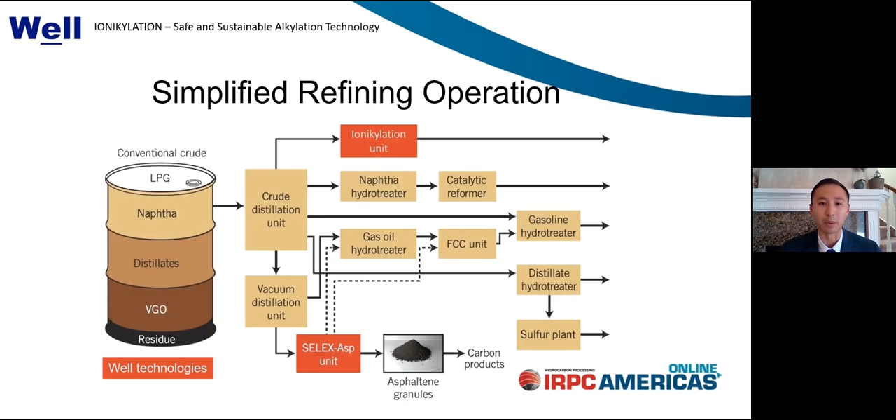Notwithstanding the short-term impact of COVID-19, there has been a growing demand for alkylate gasoline, underpinned by an increasing consumer base and a move towards higher performance engines, which require premium fuels. In North America, there have been historical environmental concerns over alternative gasoline blending stocks, such as tetraethyl lead and MTBE, which contributed to air, soil, and water contamination. Stemming from this are changes from a regulatory standpoint relating to increasing fuel standards with the aim of getting better fuel economy and cutting harmful emissions.

Alkylate is becoming increasingly sought after as a gasoline blending stock due to its inherently high octane number, typically in the range of 92 to 96 and as high as 98. Alkylate is clean burning, being free from olefins and aromatics, has low sulfur content, and is suitable for engines with high compression ratios, meaning more efficiency, more power for less fuel consumed.

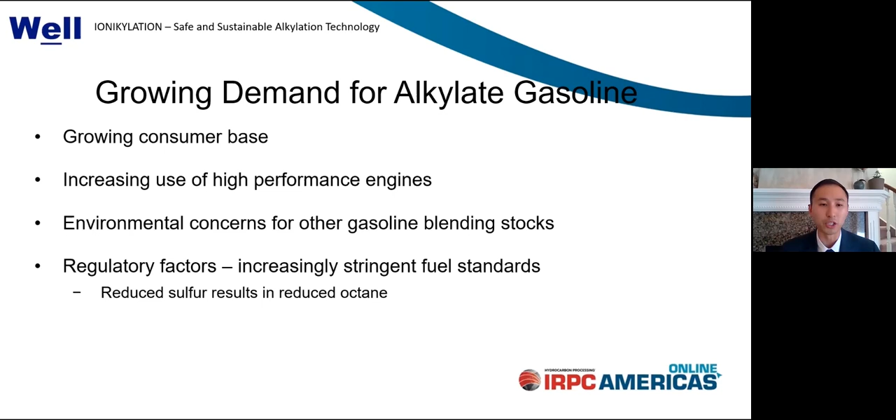Here's a listing of the various options available for producing alkylate. The first group are what I would call the legacy alkylation technologies, which either use HF or concentrated sulfuric acid as catalysts. While both of these processes are well defined and widely implemented, refiners using acid-based alkylation technologies require exotic metallurgies for process equipment and costly safety systems to protect refinery personnel and the public. The disposal and regeneration of spent catalysts are also problematic. For example, regenerating large quantities of sulfuric acid is carbon and sulfur emissions intensive and bad for the environment.

The second group encompasses what I call the newer alkylation technologies, which include the use of solid acids and ionic liquids. A subset of the ionic liquid category is composite ionic liquid, or what I call CIL, and this is the basis for Well's technology. I specifically highlight the composite nature of our catalyst because it is key to allowing us to overcome the typical corrosion and product selectivity issues arising from non-composite formulations.

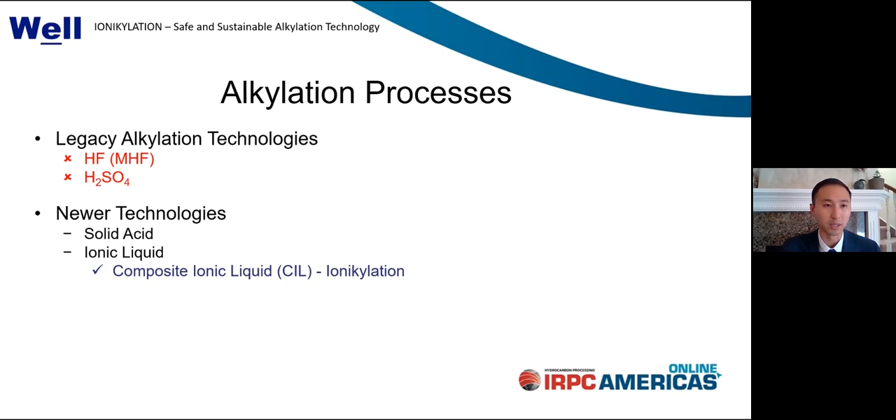Just to contextualize the risks associated with acid-based systems, there are about 50 refineries in the United States using HF, and on average, each facility stores about 212,000 pounds of this material. The EPA rates HF as highly toxic, and a large vulnerable zone must be established wherever this material is used. If released, HF tends to form a dense vapor cloud that can cause permanent injuries to the extremities and biological internals, and this has been widely explored already.

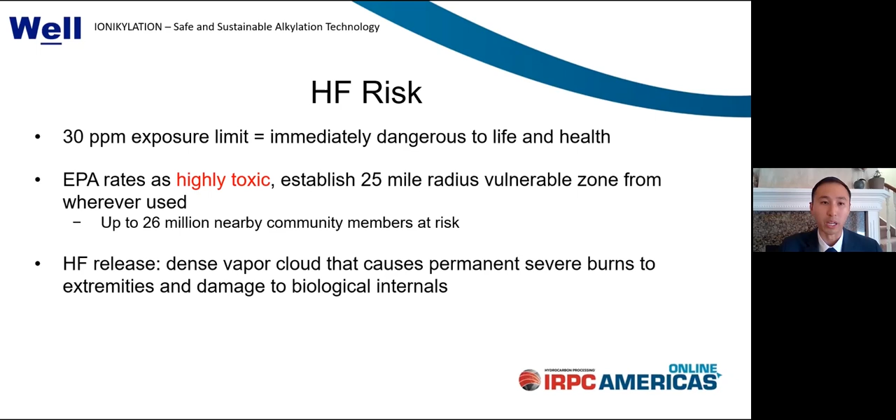When things go wrong in a refinery, it can be devastating, and here are just two examples. In 2015 and 2018, incidents in California and Wisconsin presented very real near-miss scenarios for HF release, when units adjacent to the refinery alkylation units exploded. In both instances, nearby community members were forced to evacuate for their own safety, and these incidents really highlighted the risk of industrial-scale HF use near populated areas.

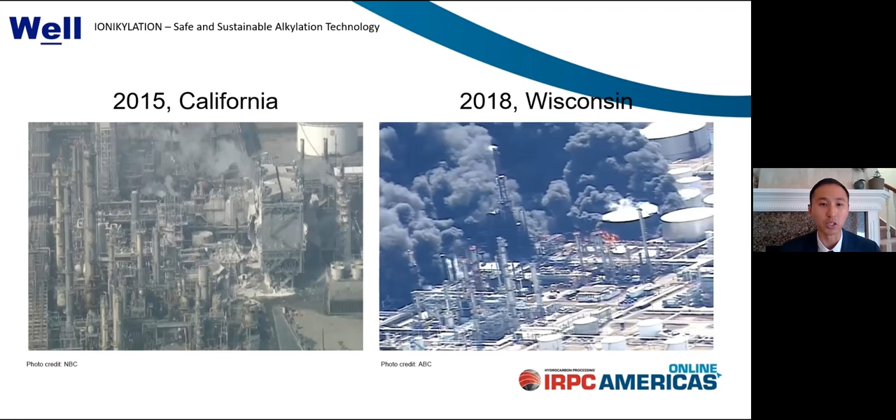Subsequently, local communities rallied to call for ending the use of this chemical in the operations and have even asked local regulators to step in.

Some of our viewers might remember this. In mid-2019, there was a refinery explosion in Pennsylvania where the HF alkylation unit suffered a catastrophic failure. The end result was that the refinery was rendered inoperable, and the operator subsequently filed for bankruptcy protection.

When we look at the bigger picture, over the years, there have been many instances of refinery personnel suffering injury as a result of accidental exposure to acid catalysts, irrespective of a catastrophic failure. Discussions on safety have largely been around preventative and secondary containment measures, largely due to the fact that there was no viable alternative, that is until now.

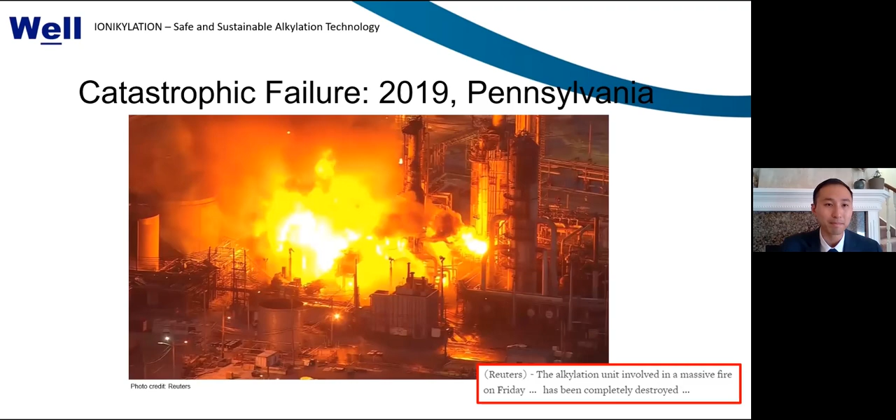But regardless of the safety measures put into place, there are real costs associated with the use of inherently unsafe processes in your operations, which can affect your bottom line. Here's just a sample from a Reuters article from January discussing the rising costs of insurance for refiners. In some cases, insurance rates have increased by 25 to 100%, and some refineries have subsequently pared back their coverage as a result.

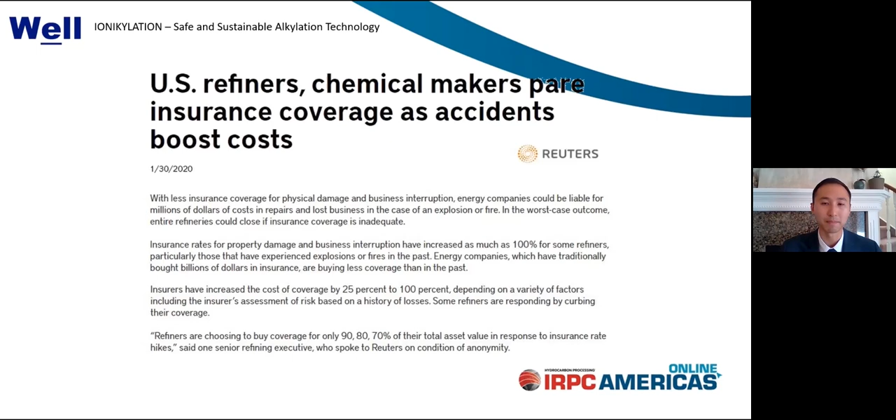So let's talk about Ionikylation. This technology derives its name from composite ionic liquid catalyzed alkylation. Ionikylation is characterized by five sub-processes. The first is feed pretreatment, followed by reaction, then product separation, product treatment, and catalyst regeneration.

Alkylate and light ends are subsequently subjected to fractionation, and unconverted reagents such as isobutane and N-butane are collected and recycled as needed. Depending on the user's required product specifications, alkylate may be subjected to a variety of post-treatment methods such as chloride removal, typically by adsorption.

At the bottom, extraction is used to remove a small quantity of spent catalyst from the process in the form of a benign solid, while the recovered catalyst is routed to the catalyst regeneration unit. At the catalyst regeneration unit, makeup catalyst active reagents are introduced. A regenerated catalyst is then routed back to the Ionikylation reactor, and an organic chloride compound is added to supplement the catalyst activity.

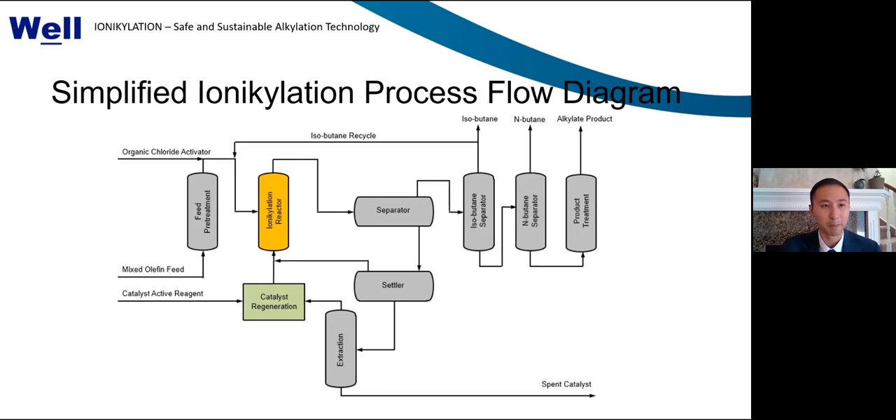So there are many advantages to the Ionikylation technology, and as I said previously, at WELL we're really looking to move the needle and provide a stepwise improvement to the current way of doing things. We understand that to do this, any compelling technology has to be competitive from a process performance standpoint, as well as from an economic standpoint.

By far, the greatest advantage of Ionikylation is its ability to eliminate a refiner's reliance on toxic and corrosive acid catalysts such as HF and sulfuric acid, which increases the safety for refinery personnel and the public. Because of the non-corrosive nature of our catalyst, all Ionikylation process equipment is manufactured using carbon steel, which significantly lowers the capital cost burden for greenfield and brownfield new builds, as well as revamp and replacement scenarios.

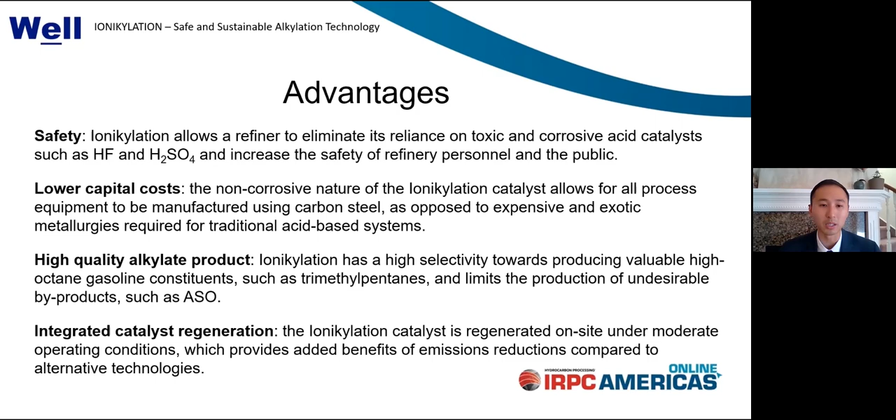Our catalyst is also formulated to have high selectivity towards producing the most valuable high-octane gasoline constituents, such as trimethylpentanes, while limiting the production of undesirable byproducts, such as acid-soluble oil or ASO. Our process also includes an on-site catalyst regeneration unit operating under moderate conditions, which significantly reduces emissions when compared to a scenario where you have to truck large volumes of spent acid catalyst to an off-site facility for treatment.

When we compare the legacy acid-based alkylation technologies to Ionikylation, a very clear picture forms. With HF, indeed, it is among the best in terms of producing high-quality alkylate due to its high activity and selectivity. However, it ranks quite low on safety measures, as it's both hazardous and extremely corrosive.

In comparison, while sulfuric acid is less hazardous, it still makes for a corrosive system, and catalyst activity and selectivity measures are greatly diminished. Hence why sulfuric acid-based alkylation systems require orders of magnitude more catalyst than the others. For our CIL-based process, it simply checks off all the boxes in terms of safety and performance, and I'll get into more of this as we progress through the presentation.

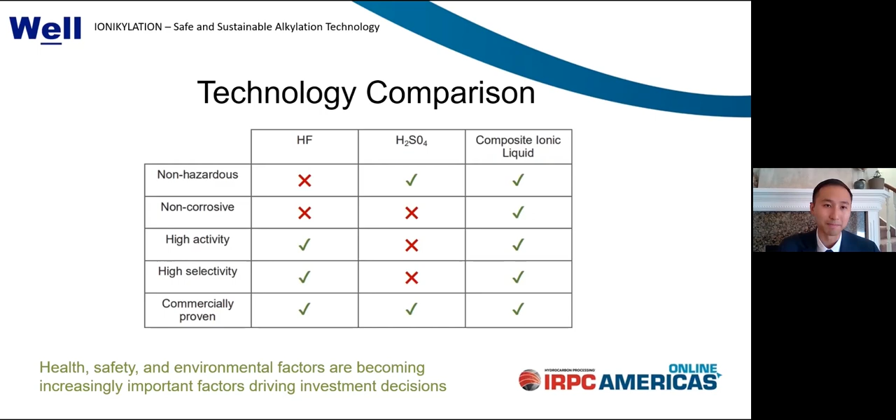Here we summarize the typical ranges of operating parameters for the key pieces of ionikylation equipment. As you can see, the conditions are quite moderate.

We normally recommend a feed isobutane to olefin ratio of 8 to 10 to 1, but it is not unheard of to have specifications outside of that range, which we can look at for you on a case-by-case basis if needed. When feed is injected to the ionikylation reactor, the reaction happens quite quickly, and in the presence of excess isobutane, we observe an isobutane to olefin ratio inside the reactor of greater than 100 to 1.

From a process performance standpoint, ionikylation produces superior quality alkylate with octane numbers ranging from 96 to 98, and this is dependent on the feed quality as well as how the user operates their unit. A very small amount of ASO is produced in the process, accounting for less than 0.1% of alkylate produced, and it is recovered and typically used as a diesel hydrotreater feed.

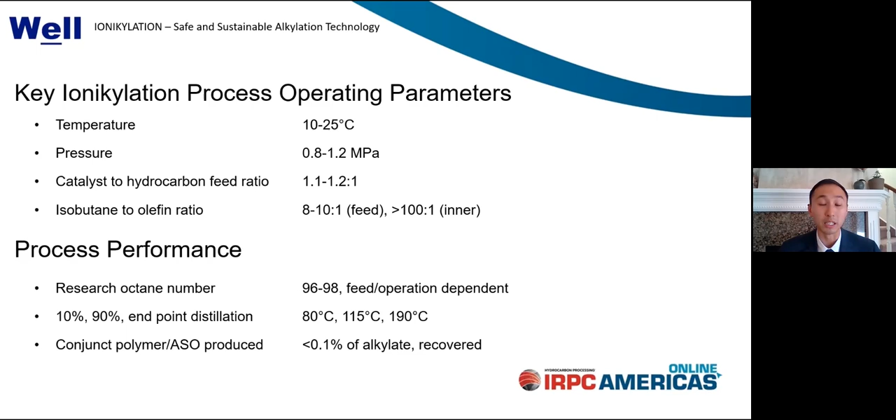Ionikylation is the culmination of over 20 years of research and development, and not only is it now market ready, it is already implemented in Asia with demonstrated through multiple commercial units. Catalyst and process development started in 1998, and it took a few years for us to formulate, synthesize, and fine-tune the details. In 2003, we successfully completed a 2-month, 20 tons per year, or 2 kilogram per hour continuous pilot test.

In 2005, we were given the opportunity to retrofit a commercial scale sulfuric acid alkylation unit owned by PetroChina, which yielded promising results. In 2013, the world's first greenfield ionikylation unit was commissioned in Shandong, China. This was built and operated by a private company as a standalone boutique unit supplying alkylate to the local market.

Commercial licensing ramped up in 2017 as Asian refiners began prioritizing health, safety, and environment in their operations, supplemented by that 2013 unit demonstrating commercial viability.

In 2018, 6 additional units were licensed, and PetroChina commissioned its first ionikylation unit at its Harbin refinery. In 2019, 2 additional units were commissioned, one by PetroChina and one by Sinopec. Sinopec also commissioned its second unit in the first quarter of this year at its Wuhan refinery, which was the world's first revamp from an existing HF unit.

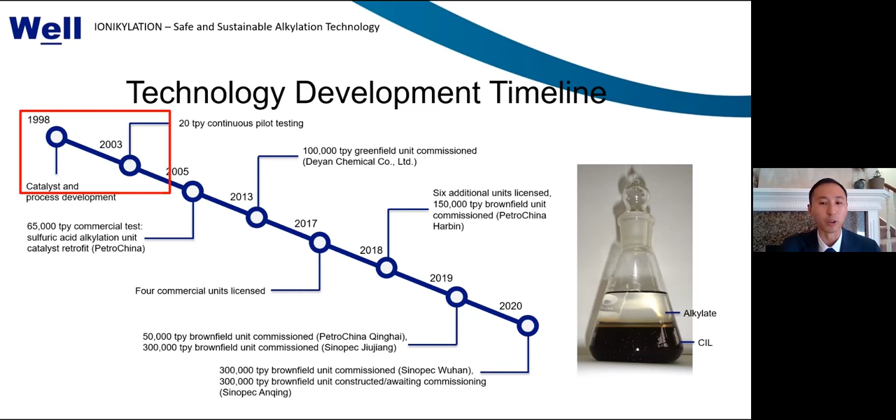Back in the late 1990s, we originally explored the use of ionic liquids as a quote-unquote super acid catalyst to crack petroleum residua at low temperatures. While we were largely unsuccessful in that endeavor, we did find that CIL was an excellent alkylation catalyst due to its high activity, reactivity, and selectivity towards producing high-quality alkylates.

But to get there, it was a bit of a journey, and there was a lot of trial and error in between. So here in the red, we show the iterations that represent our first trial stages, where we aimed to modify product yield and selectivity. We found that this could be achieved by modifying aluminum chloride mole fraction, as well as doping the ionic liquid with acids such as HCl.

Unfortunately, these systems we found were still corrosive, and our thinking at the time was that if corrosion still persists, that is not much of a stepwise change from the existing acid-based systems.

So next, in the yellow, are the second trial stages. Here we tinkered with different formulations to overcome the corrosion issue while maintaining activity. But what we found was that these mixtures tended to produce suspensions with the alkylate, which would make it difficult to separate in commercial settings and therefore non-viable.

Last, our team was finally able to develop an optimal CIL catalyst that could overcome all of the issues mentioned previously, in that it produced what we wanted, it was non-corrosive, and could be easily separated from the alkylate product.

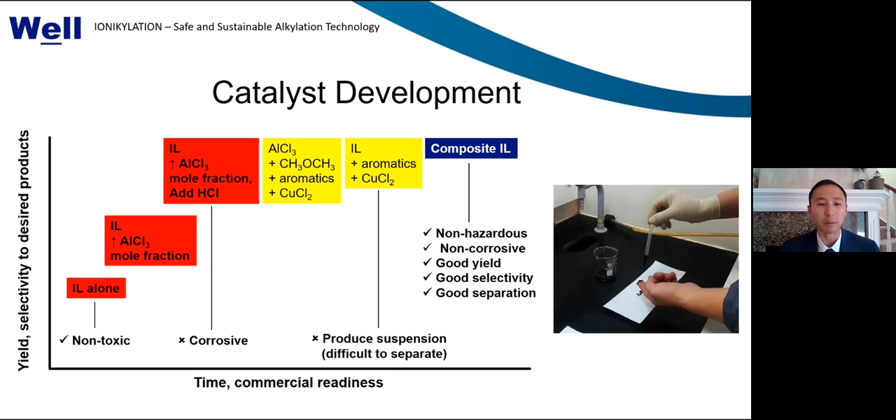This table summarizes the 6 commercial units constructed or already commissioned in Asia. 5 additional licensed units are either at the engineering stage or under construction, with the largest one currently slated with a 400,000 tons per year processing capacity, or roughly 10,000 barrels per day. So in total, worldwide, there are currently 11 commercial ionikylation licenses issued.

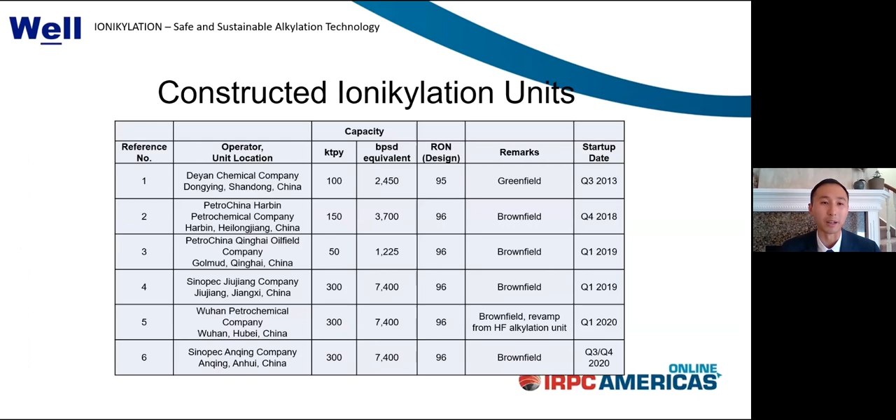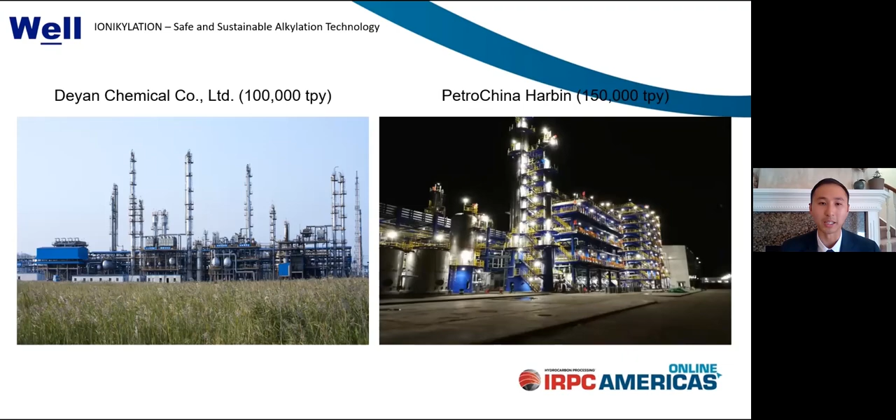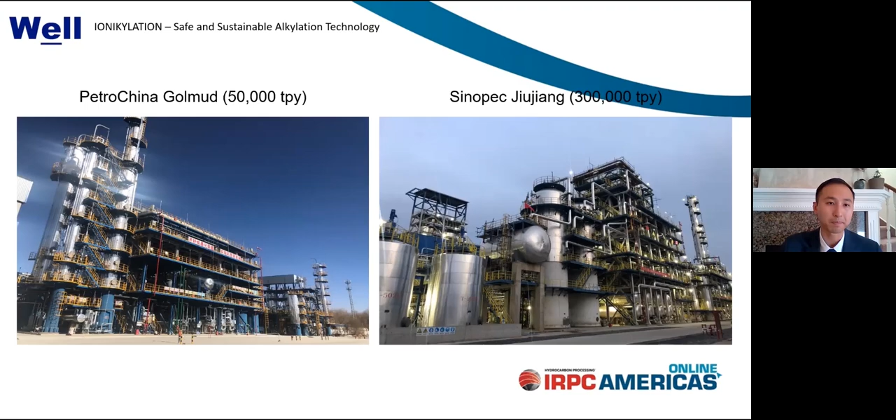Here are the images from the ionikylation units commissioned last year by PetroChina and Sinopec. And here are the Sinopec units with 2020 commissioning dates. The Sinopec Wuhan unit shown on the left, as previously mentioned, is the world's first commercial scale revamp from an HF alkylation process, and we're very excited about that.

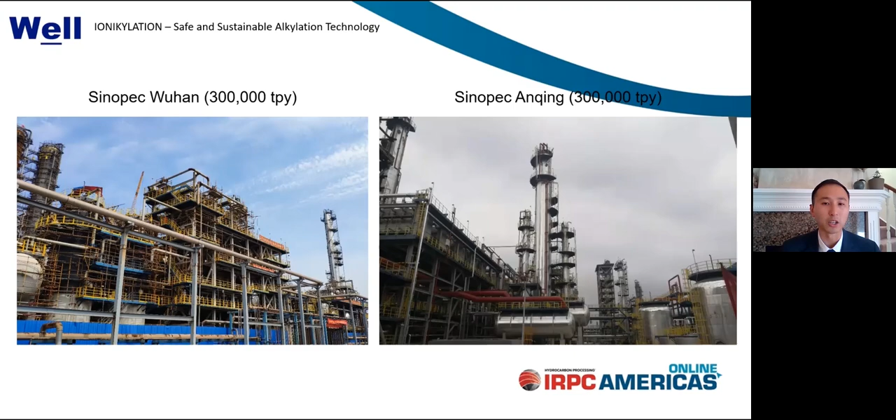This revamped unit was one of the last two remaining HF alkylation processes in operation in China. The Sinopec Anqing unit shown on the right was originally scheduled to be commissioned earlier this year, but due to complications from the COVID-19 pandemic, the scheduling has been pushed out to later this year.

So the next section is a case study of commercial ionikylation performance from one of the recently commissioned units in Asia.

Specifically, the data comes from the PetroChina Harbin unit that was commissioned in November 2018. At this point, I do want to thank PetroChina Harbin for allowing us to share this data in a public forum. After about half a year after commissioning, the operator conducted a calibration test to benchmark and compare commercial performance data against design specs to identify optimization opportunities.

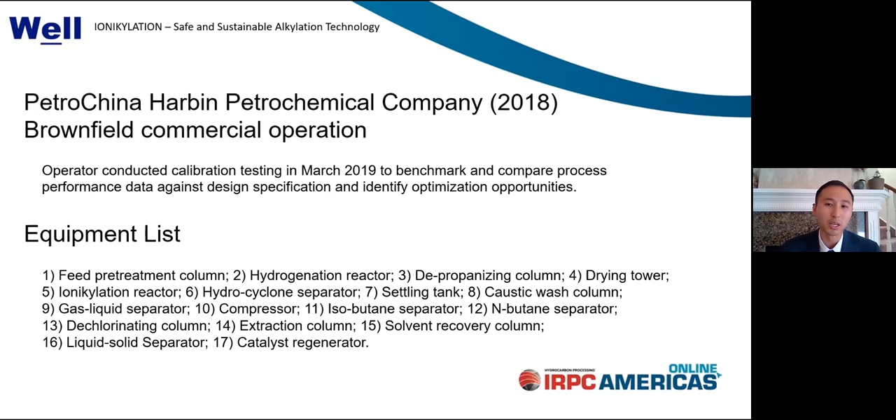To date, no safety-related incidents or concerns have been identified. And for anyone receiving a copy of this presentation afterwards, the equipment list provided on this slide coincides with the diagram on the next page.

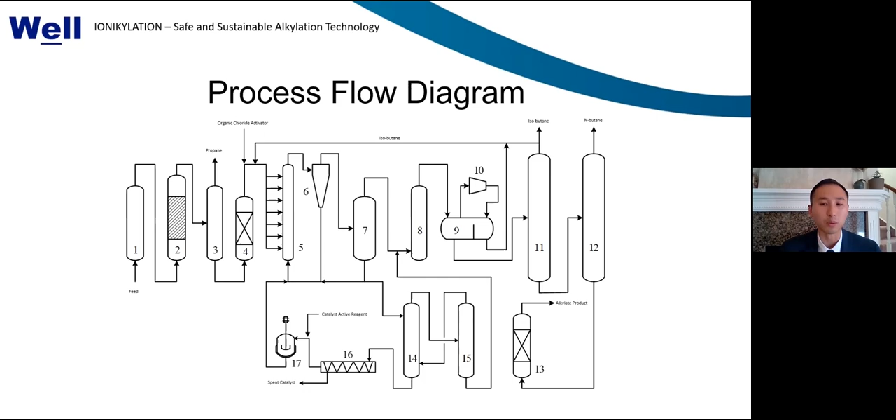The process operating flexibility for the Harbin unit was 60 to 110% of the designed processing capacity, and feedstock originated from an upstream MTBE unit. For this operation, a feed pretreatment hydrogenation unit was required for the hydrogenation of methyl ethyl ketone, and a dechlorinating adsorption agent was used for product treatment.

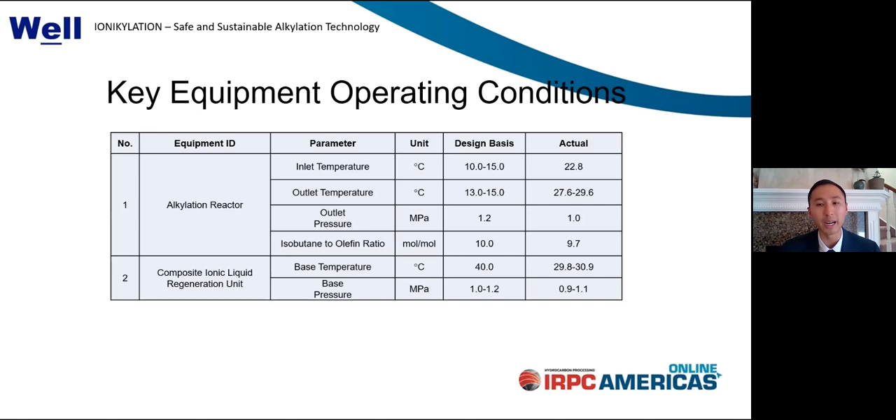Oftentimes, we'll be asked about the impact of operating the alkylation reactor at a higher or lower temperature. Based on our experience, for every about 10-degree increase in reaction temperature, this will decrease your alkylate octane number by about 1. Where this comes into play is during the design phase of a unit, where feed quality and an operator's product octane requirements will guide us in determining the degree of cooling that is needed in your system.

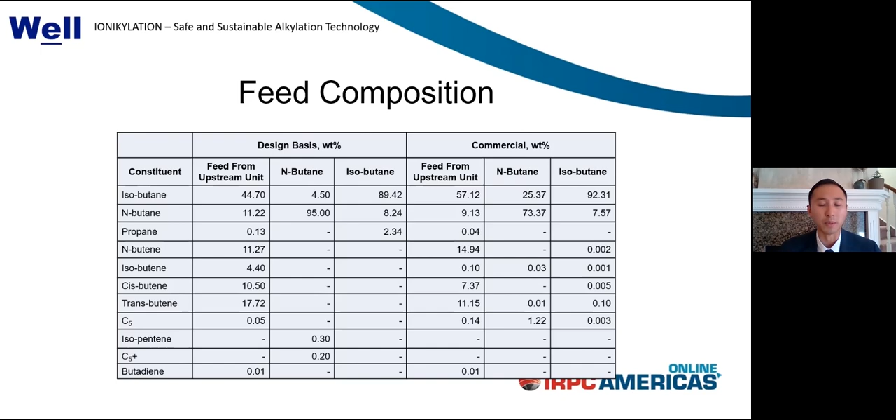One takeaway from this table is that regardless of what you design for, commercial operations are often difficult to predict and will always observe some degree of deviation. But despite the highlighted deviations in feedstock composition and reaction temperature, our process still rises to the occasion.

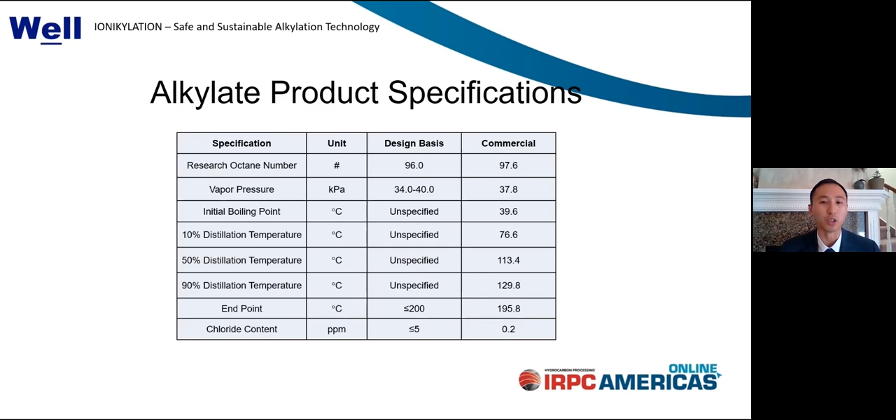Here's a more detailed breakdown of the alkylate composition. The process achieved 100% olefins conversion, and the vast majority of the product stream consisted of the sought-after isoalkanes. The C8 alkylate yield was about 77%, which is comparable to or exceeds the performance of traditional acid-based alkylation processes.

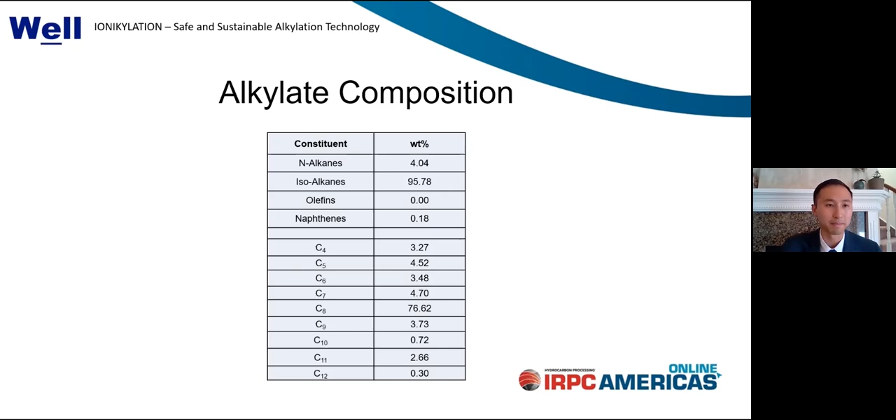Utilities consumption is also provided on a normalized basis in kilogram of oil equivalent standard. The takeaway here is that the commercial operation fell within 1.5% of the design specs. Note that the utilities consumption load for our process is quite similar to the traditional acid-based systems.

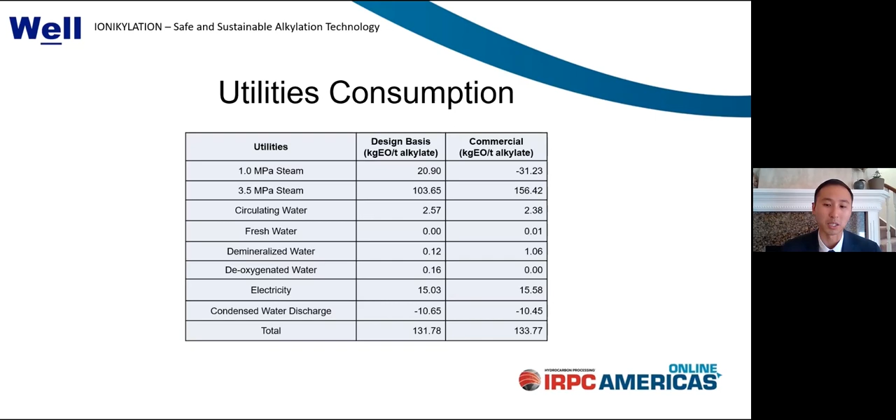Since ionikylation is a catalyst-based process, it's only fair to talk about catalyst consumption. For this operation, the design catalyst consumption was based on the performance of the previous commercial unit commissioned in 2013. However, due to recent process and catalyst manufacturing improvements, total catalyst consumables for this Harbin unit decreased by 46%, leading to significant, immediately realized and ongoing cost savings for the operator.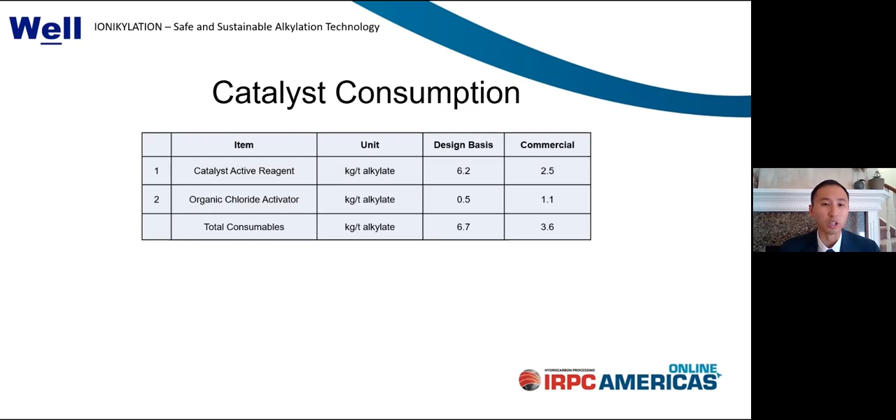One thing I also want to emphasize is that ionikylation is still a relatively new process, but this means there's a lot of opportunity for improvement as the process becomes more widely adopted into the future.

The spent catalyst byproduct from our process is chemically benign and can be safely handled and disposed. Here you can see the various stages of byproduct handling, moving from a benign paste discharged from the process all the way to a dry mineral-like solid.

A relatively small amount of this material is produced, and based on existing operations, it can be removed every few days up to two weeks, depending on the operator's needs or preference. Disposal options are also dependent on an operator's philosophy and local regulatory requirements, if applicable.

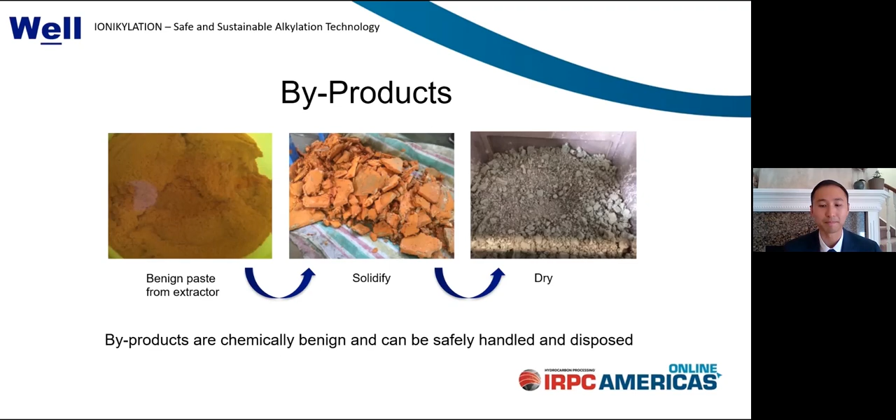This is just a brief reference to that 2013 greenfield unit constructed by Deyan Chemical Company. The crux of our process is the use of the non-corrosive CIL catalyst, which allows for all process equipment to be manufactured using low-cost carbon steel.

This Deyan unit operated for 3 years continuously before it was briefly shut down for a 2-week period for a rigorous government safety inspection. The inspection found no signs of corrosion within the process equipment whatsoever. There were no mechanical or maintenance issues, and the operator had no problem restarting the unit.

So in terms of ease of operability during a turnaround scenario, we don't see any issues. And with regard to the frequency of turnaround, all I can say is that the most likely scenario for taking this type of unit offline would be when performing a turnaround on units upstream of the process where you disrupt the feed.

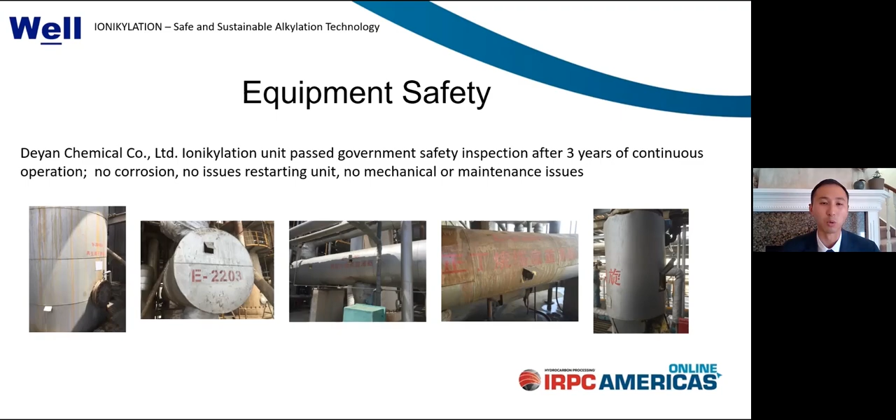Here is the recommended guidance for feed contaminant limitations. And the takeaway here is that there are various control measures available for achieving these specifications.

We do very tightly want to control water content in the feed because it will hydrolyze the CIL catalyst and break it down.

And as a feed pretreatment step, we also frequently recommend isomerization of 1-butene to 2-butene, as this will drastically improve the alkylate product octane number. Greater degrees of other contaminants typically serve to reduce the catalyst activity, which means you might need more catalyst if contaminants are not controlled.

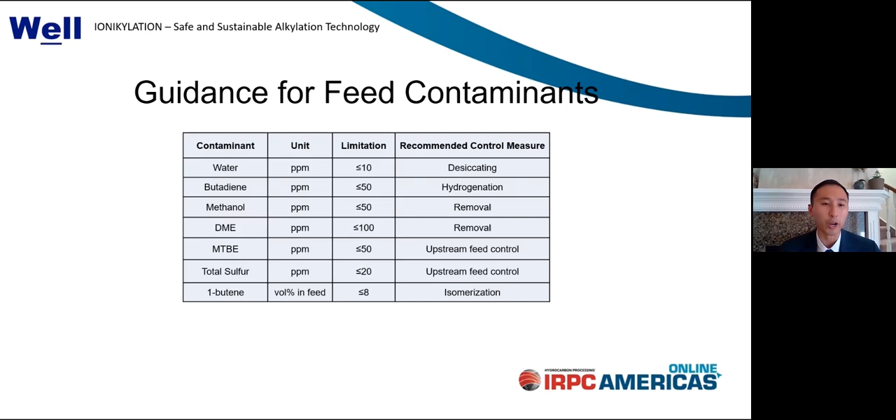Lastly, I want to quickly discuss scenarios for converting existing acid-based alkylation processes to ionikylation based on our previous experience. Regardless of which process you're converting from, the minimum equipment required will include the ionikylation reactor and the catalyst regeneration system, as they're unique to our process.

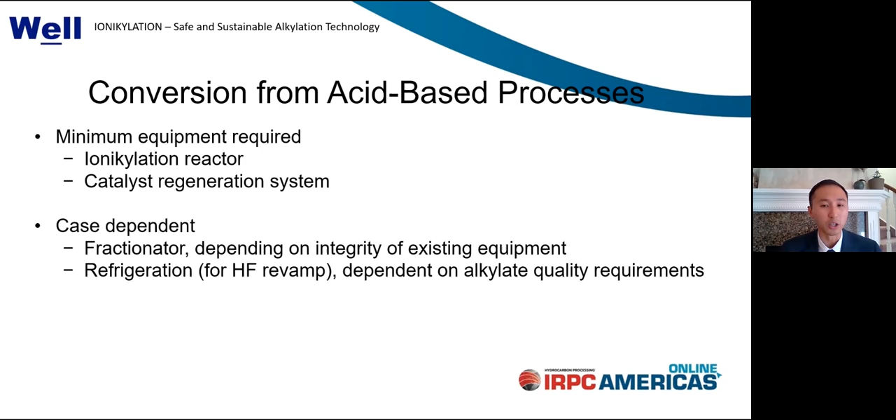In addition, depending on the integrity and setup of your existing equipment, a new product fractionator may or may not be required. For revamping a sulfuric acid system, much of the existing cooling system may be reused, but for revamping an HF alkylation system, which typically doesn't have additional cooling, a refrigeration system might be a consideration depending on the end user's alkylate quality requirements. In any case, each conversion scenario is considered on a case-by-case basis.

So in conclusion, a safe, sustainable, and viable alkylation alternative now exists, as commercially demonstrated in both greenfield and brownfield operations. That technology, ionikylation technology, we see it as replacing the traditional HF or sulfuric acid-based systems that are unsafe and harmful to the environment.

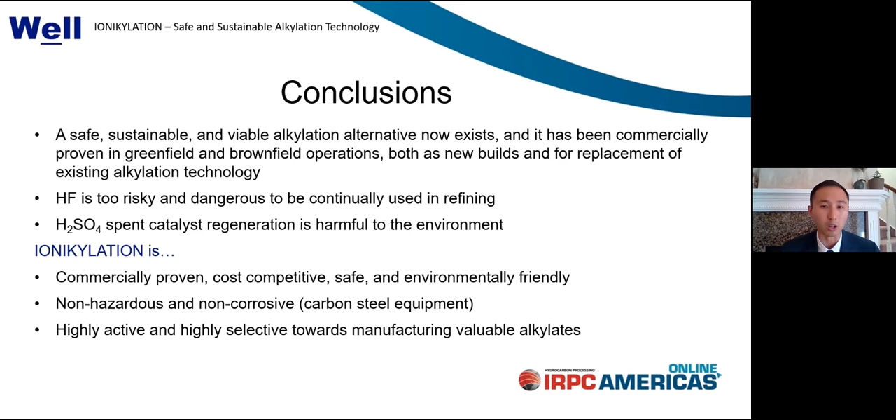Ionikylation is cost-effective, safe, and environmentally friendly. It uses a non-hazardous and non-corrosive catalyst that allows for all equipment to be manufactured using carbon steel. It also has high activity and selectivity towards manufacturing the most valuable alkylates and will meet the needs of a green and clean energy future.